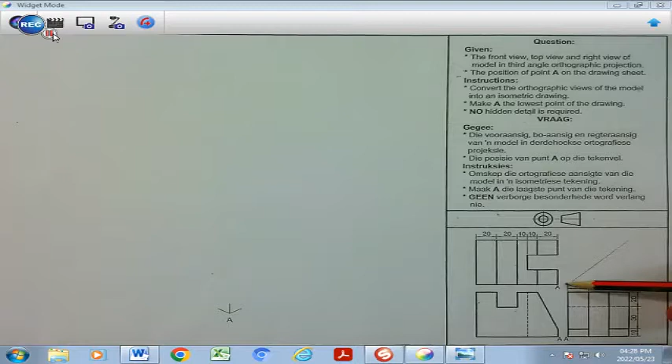So this is your front view, that is your top view, and this is your right view. And of course, the 45-degree line is there, which basically leads you to the different parts that we will have linking with one another from the different views. You will be able to ascertain what these dimensions are by looking at the different views and how it relates to each other.

So if you look at this drawing, I'm going to show you a different method of producing isometric drawings where we're going to make use of the block method. Of course, no hidden detail in this drawing is required, and that will be your starting point.

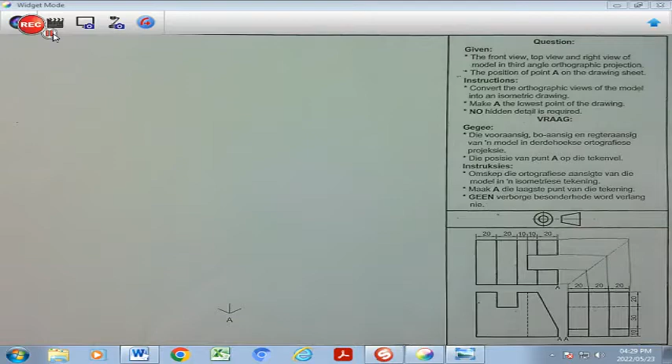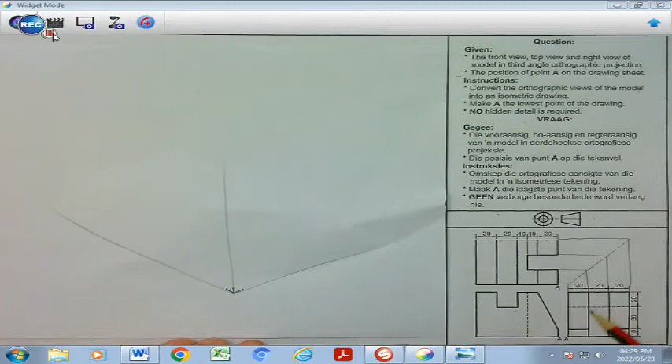Now, for planning purposes, I'm going to take this white sheet and create my starting point over here, which is going to be my lowest point. I'm going to start with my three most important lines, which is 30 degrees to my right, 30 to my left, and my height line, which goes up vertically. I'm going to have to look at point A.

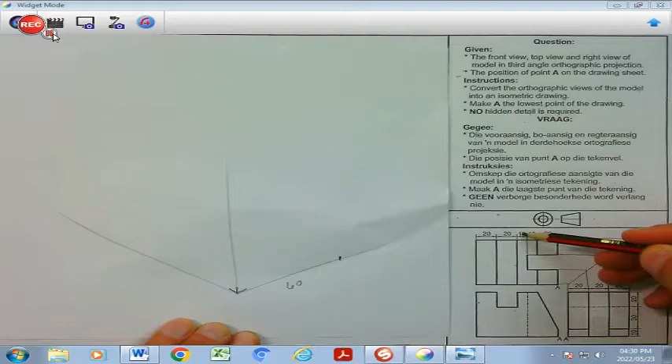This here on this side is going to be my width, which is my shorter side, which is going to be 60. So I'm going to mark off that 60 on that line. This side of my A is going to be my length, that's my longer side, and you will see here it's 20 plus 10 plus 10 plus 20 plus 20, which gives me 80.

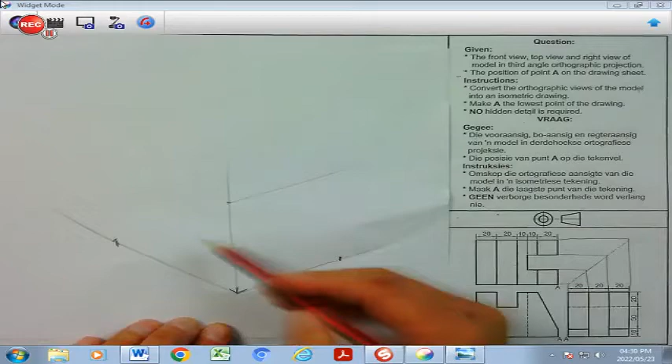And I'm going to have a height of 10 plus 30 plus another 20, which gives me 60, measured from here to there. By doing so, having my three dimensions, I can actually draw an entire box by doing this and projecting it back, and there I have an entire box of which I have put my respective drawing in. Now I can close it up like that, and that's basically the box that I formulated.

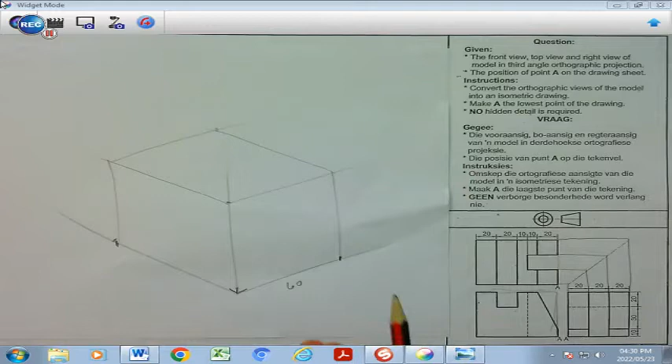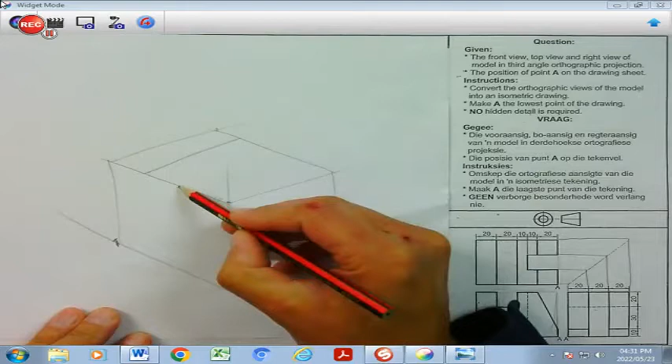Now I'm going to use the box and cut out the pieces that are not belonging to this model. So the first thing that I'm going to cut out is going to be this sunken section here, and it's going to be a 20 and a 20 cut out. So 20 from the back is going to be there, so I'm going to measure 20 and I'm going to measure another 20, and I'm going to drop down by that much, which is 20.

So I'm going to draw these lines down and measure down 20. And as soon as I have that, there will be a line forming here on that side, and there will be a corner forming there as well. So I've cut that part out.

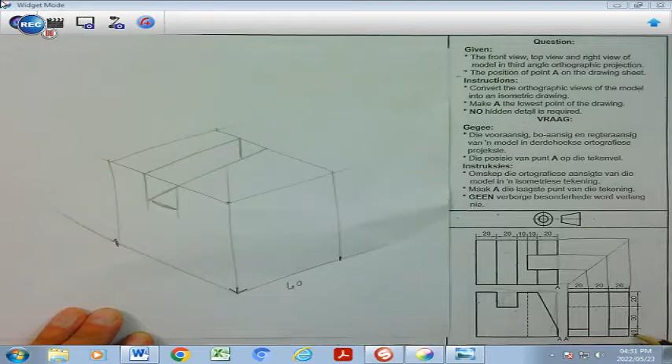I'm now going to go to my front part here, where it slants basically to a height of 10. So firstly, I'm going to create my slanted top. That's going to go in 20 millimeters, so I'm going to measure 20 in from there, and I'm going to draw a line like that there.

And I'm going to measure up from the bottom, which is 10 up from the bottom, and I'm going to draw a line there. Now I'm going to slant directly from the 20 to my 10, which is going to be a non-isometric line like that there.

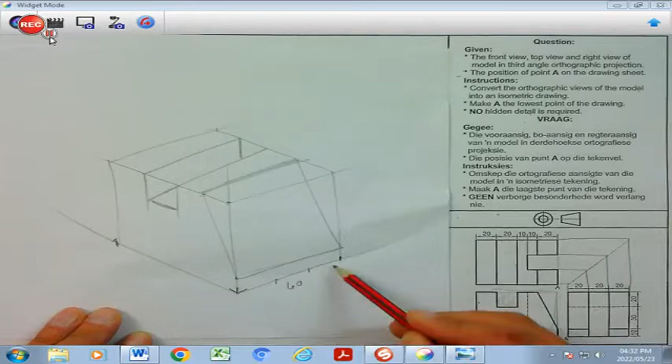Then I will have a middle part that has been cut away. So that middle part is going to be 20, 20, 20, and I have transferred these dimensions over. So I'm going to measure at the bottom 20 and another 20, which will give me the 60 that the width is all about. And I'm going to do the same on this line over here, 20 and 20.

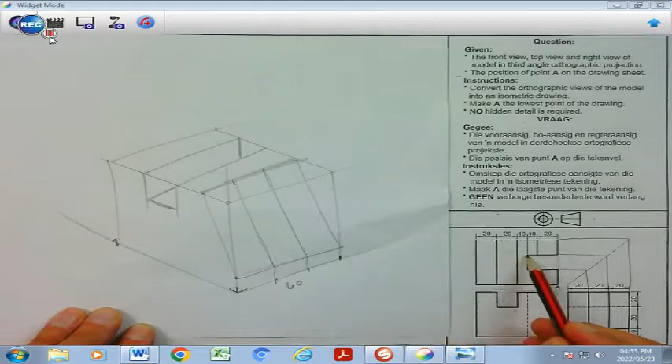Then I'm going to project that up till there, and I'm going to transfer my non-isometric line down like that. Then learners, I will find that at the top it actually goes back in by 10. So I'm going to project that to the back 30 degrees and measure off 10 millimeters, so my 10 millimeters will be there.

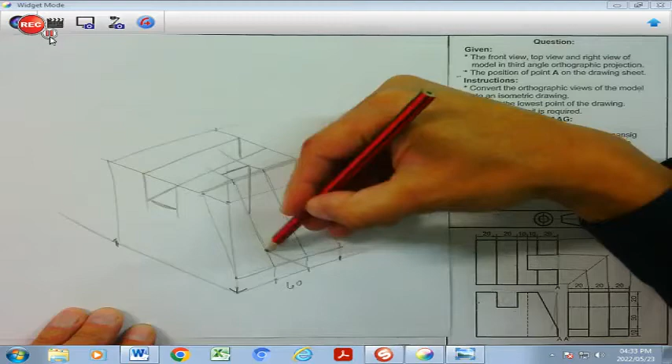And once I cut this part out, I'm going to have a line that will fade away there, and I'm going to have a line that will fade away here at 30 degrees as well. And somehow they will meet up, which would be regarded as a dash line, which is not needed in this drawing.

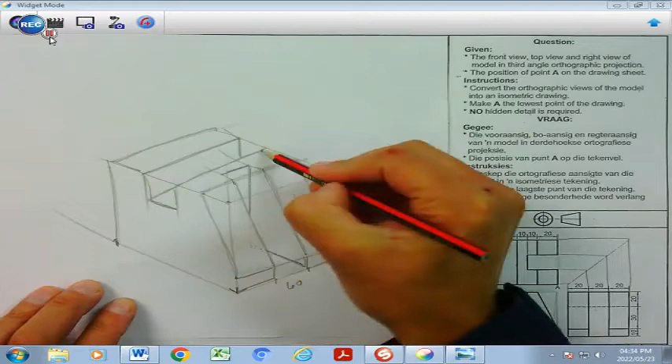So that basically will be my planning of my isometric drawing and how I unfold the drawing in a block method. If I need to highlight it, I'm just going to make sure that these are the lines that will be solid and that I have to clearly indicate those solid lines.

And from there I can project this drawing into my final drawing which I'm going to do. Please observe very carefully how I'm going to do that.